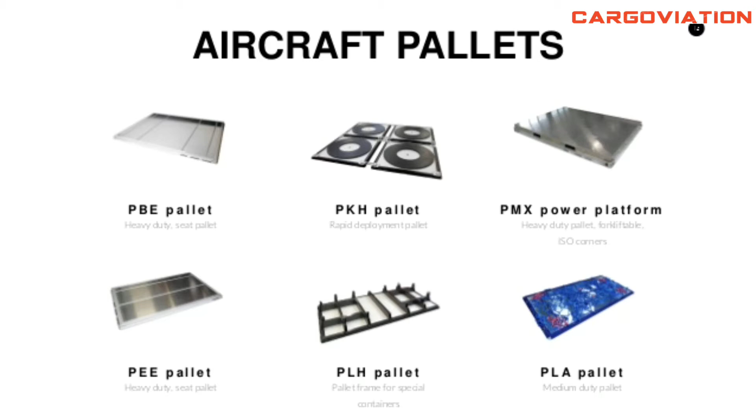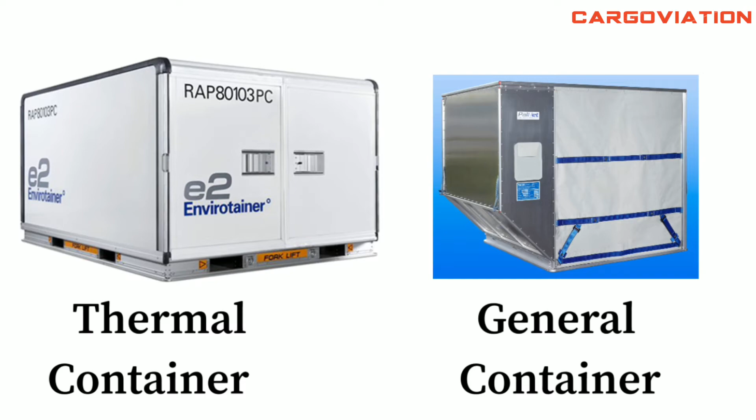There are two types of ULD: pallet and container. Pallets are open, flat, rigid sheets of aluminum having rims designed to lock the cargo onto the cargo net, whereas containers are predefined closed box type structures also made up of aluminum. There are several types of containers depending on the nature of the cargo being transported.

ULDs are identified by its ULD code. Codes such as LD3, LD6, LD7, LD9 are developed under ATA, Air Transport Association of America, whereas codes such as AKE, RKN, AMA are part of IATA ULD identification.

Let's decode the IATA ULD identification system. A unique combination of letters starting with a 3-letter prefix identifies the type, size and shape of the ULD. This code is followed by a 4 to 5 digit serial number to distinguish it from others of the same type. The last 2 to 3 characters designate the owner of the ULD.

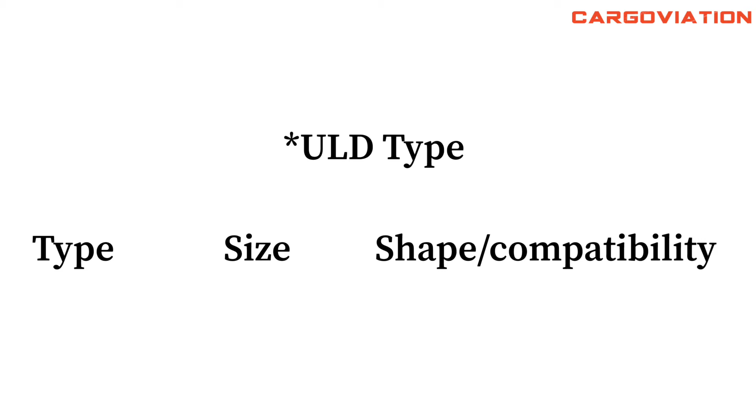The first 3 letters of the ULD code are perhaps the most important part as it identifies the type, size and shape of the ULD. This information is vital in determining not only the type of ULD but also the aircraft it is compatible with. So let's understand it in detail. The 3-letter prefixes of ULDs are as follows: the first letter represents the type of ULD.

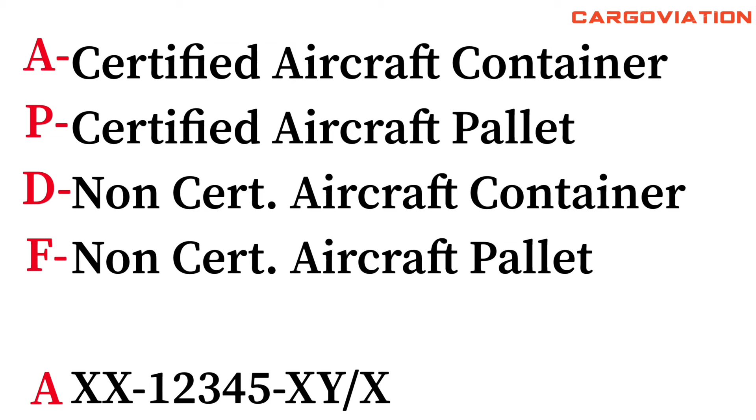It represents whether the ULD is certified or non-certified, whether it is a container or pallet. For example, A represents certified aircraft container, P represents certified aircraft pallet, D represents non-certified aircraft container, and F represents non-certified aircraft pallet. The second letter represents the base dimension of the ULD.

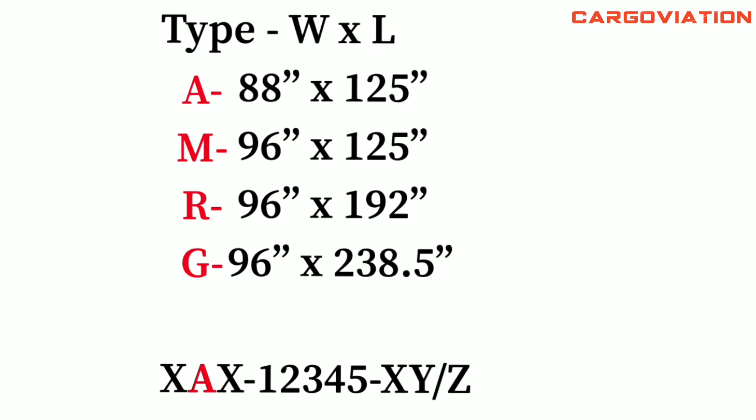It tells us the width and length of the container and the pallet. For example, A is 88 by 125 inch, M is 96 by 125 inch, R is 96 by 192 inch, also known as 16 foot pallet, and G is 96 by 238.5 inch, also known as 20 foot pallet.

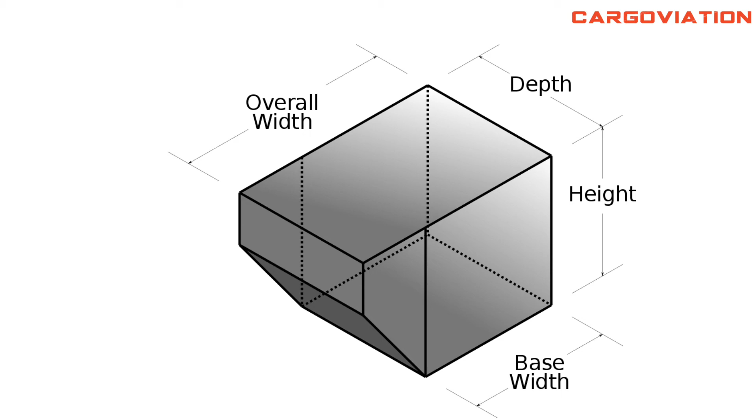The third letter of the code describes two different things depending on whether it is container or pallet. When it is a container, it determines contour, curve to fit inside the aircraft body, whether it's forkliftable or not, and other miscellaneous information. When it is a pallet, it refers to the pallet restraint system, the type of mesh, pallet net, and identifies the NAS 3610 classification to which the pallet is certified. NAS is National Aerospace Standard.

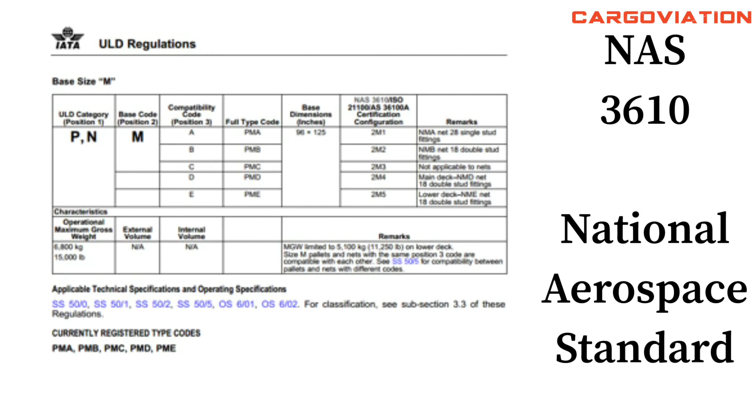For example, in case of container, contour A is a main deck container having width and height as 96 inch. Contour E is a non-forkliftable lower deck container, whereas contour N is a forkliftable lower deck container.